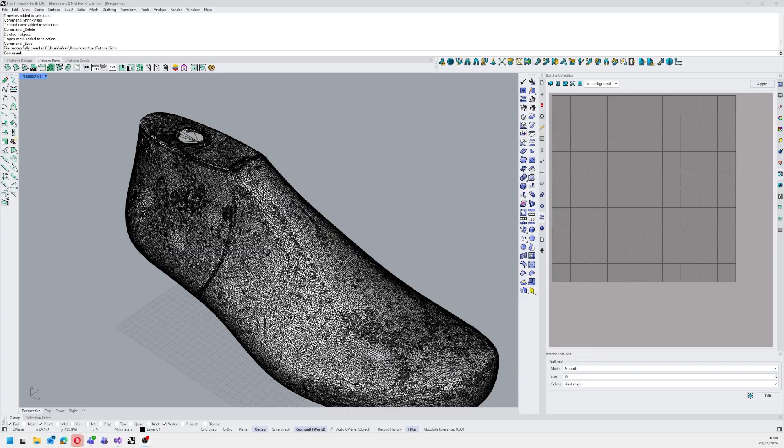Let's start with the first, technical last flattening tool that we have. But first I want to clean up and fix some of the problems that may be in our last. So I have a scanned last here, and to make it work properly, what I want to do is use Rhino 8's shrink wrapping feature.

I already have this, which has a hole up top here. So what I did is basically create a surface and fill that hole like so. And what I'm going to do is take it all and now use the shrink wrap command. Usually these are the settings I like to go for.

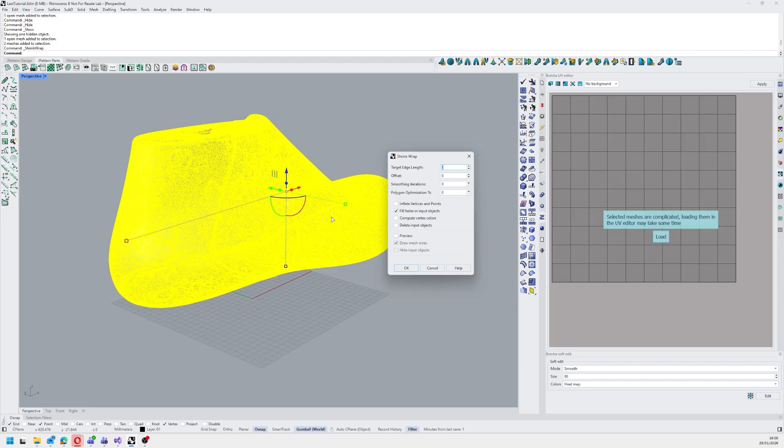It's 1mm target edge for the last, and let's see what happens. Which is kind of a nice result, and this is a much better cleaned up version of my last, and that's the thing I want to use for my flattening.

If I already have a clean last, I probably don't need to do this step. Still, I have seen some NURBS lasts that have potential issues because of the way the surfaces are built. I still recommend, if you want some cleanup, to shrink wrap everything. That will generate a topology which is much more consistent in general, and the mesh will allow you to work with it.

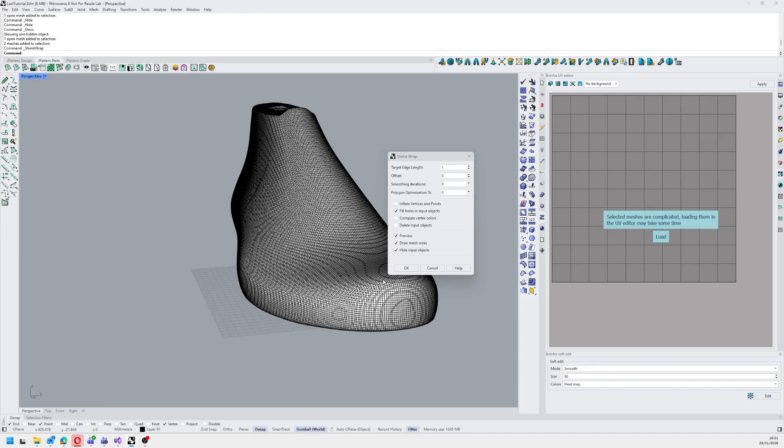So I'll take these and let me put this on a new layer. I'm gonna call it shrink wrap. So I'm gonna take my shrink wrap object, move it to the new layer, and hide the old one.

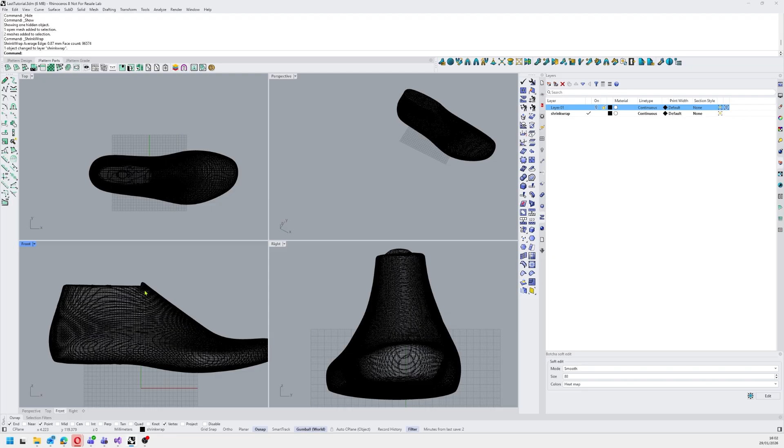The second thing that I want to do is orient the last properly. As you can see now, the front view shows me the side. So that's not what I want.

What I want is to take this and basically align it. I'm gonna move first, move the center point to 0, so that it is now aligned like so. Again, your last may come in an already aligned position. That is great, but if it's not, you will have to align it for the tool to properly work.

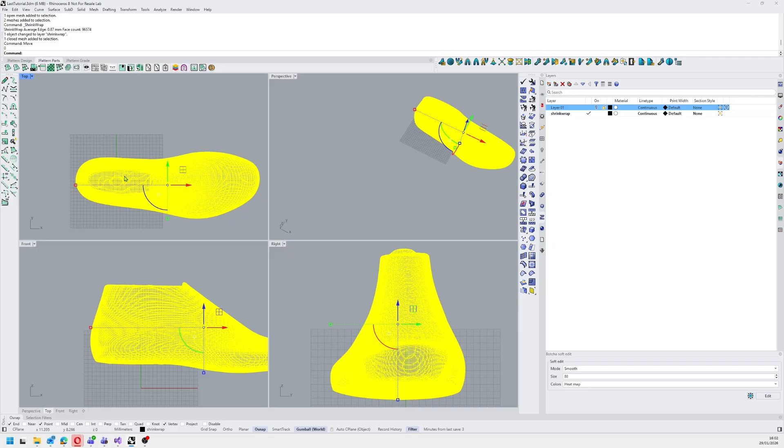So the second thing I'm gonna do is rotate. Again, I'm starting from 0, and I'm gonna rotate this along the y-axis, so that the last is oriented basically like so.

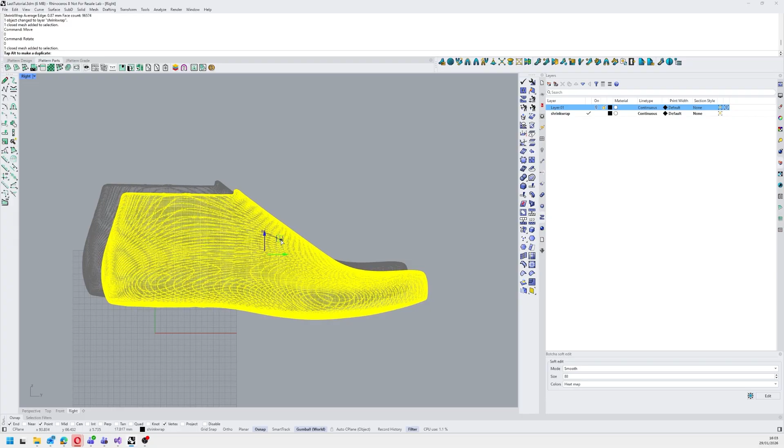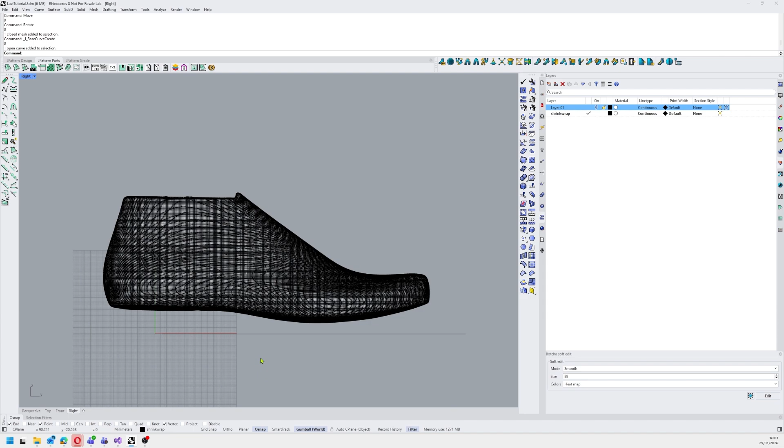I want to also move it a little bit forward. One thing that you have to notice is that the last should all be in the positive Z space. So if I draw a line at 0 down here, you could see that the last stays above the 0 of the z-axis, so that is something that is needed for the tool.

Another thing that I want to do is get a few lines out. You may have them already. In case you don't, you can easily extract these lines.

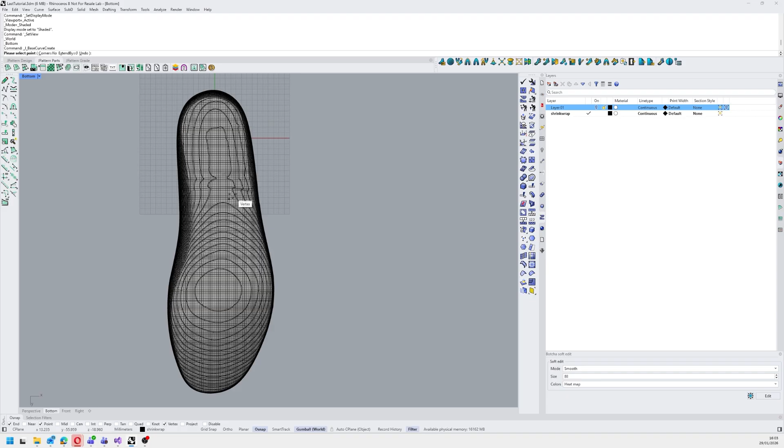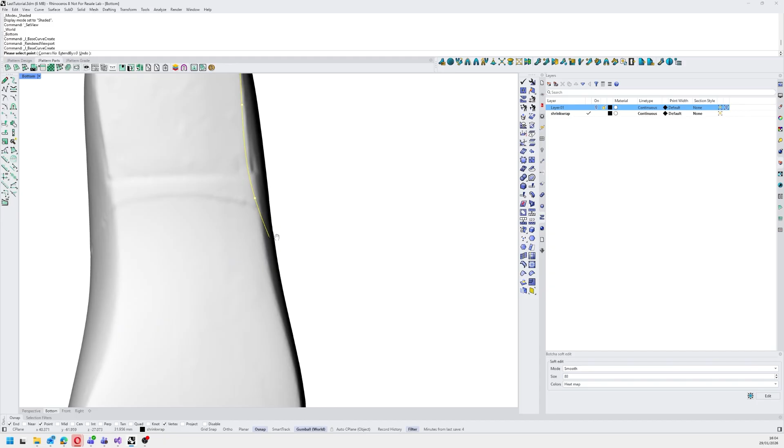And the lines are the last bottom line, the last line, and the heel line. So I'm going to use this as a reference for drawing. Maybe like so, it's better. And I'm going to draw my curve, following a little bit the bottom here.

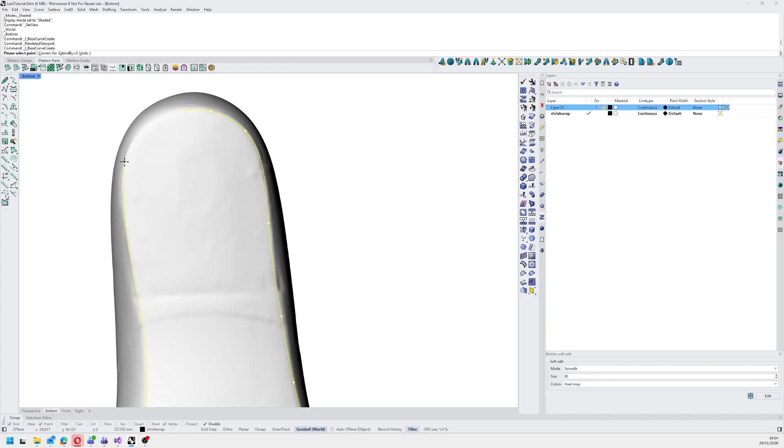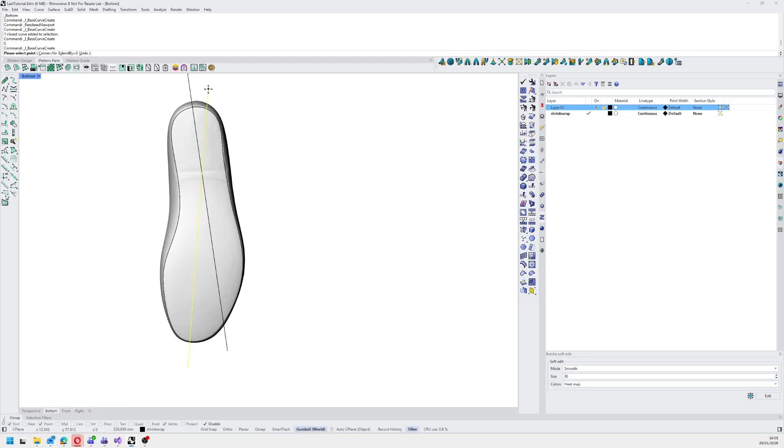Again, your last may come already with these lines, but I'm gonna build them anew. So starting from 0, I'll have this. These two lines, the heel center line and the last center line, and I'm gonna need these lines in order to do the technical flattening.

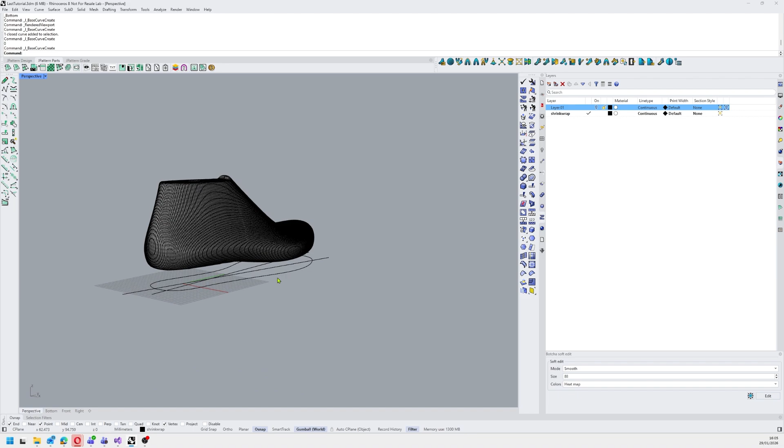So in this case I got a right last, you may have a left, it doesn't really matter. The tool will ask you which kind of last we have. So the tool can be found here, it's the flatten last intercontour curve tool, which is B flatten last. It's asking me for the last mesh, and I can tweak here if it's left or right side. Again, I got the right, so I'm gonna give it the right.

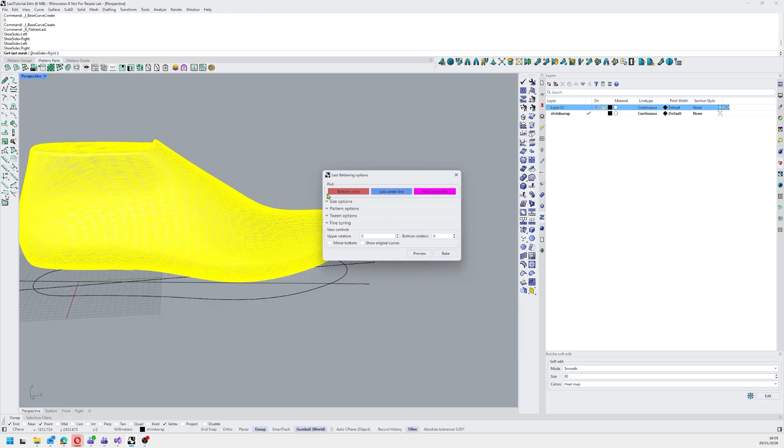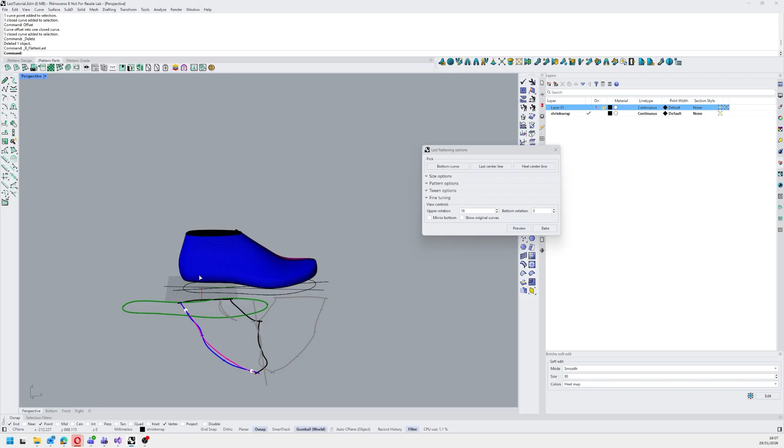Click here, then it's asking for a couple of pieces of information. The bottom curve is this one. I got the last center line, which is this one, and the heel center line, which is this one. If I click on preview, so I got my flattening done.

What happens here? So let's go through a little bit what all the tools are doing. First, I want to maybe lower this a little bit. So, and preview again.

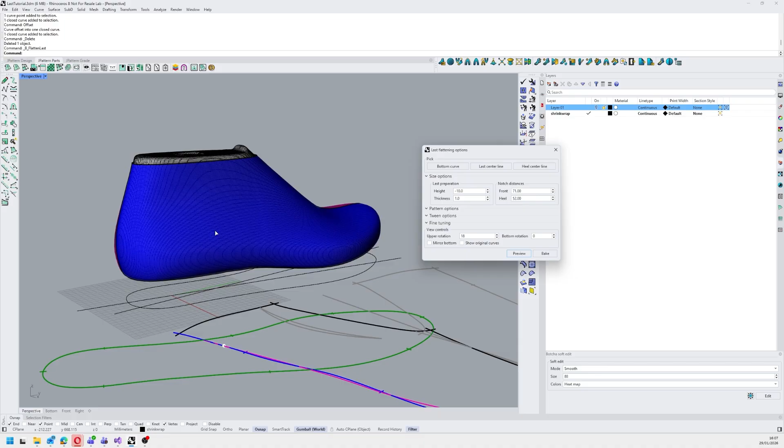So the information we got here is basically our lateral side and medial side that have been flattened, and the bottom has been extracted. You can see that all the colors match, so we have curves that make sense.

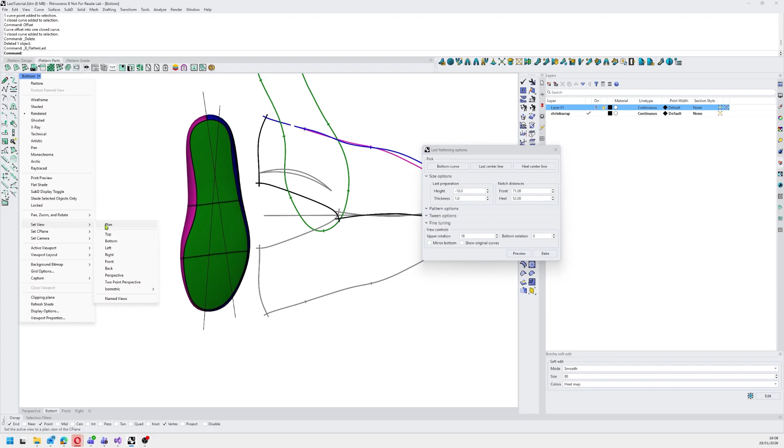Let's go back to top again. So what we have here is the flattening for both lateral and medial. We have the two curves for the medial side, the lateral side, and the mirrored version of this curve.

A mirror line automatically should align the mirror axis on the correct position. The bottom may not be perfectly aligned, but you can tweak this here however you want, if you want it like that, or on the other side.

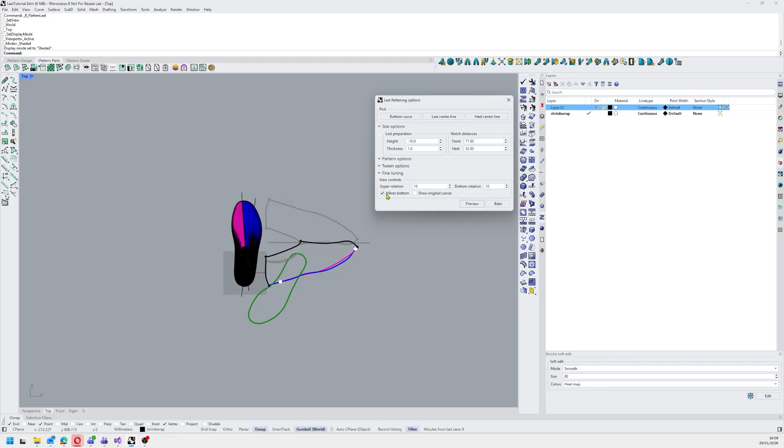So if you want to mirror it, you can click on mirror and it will mirror it, like that.

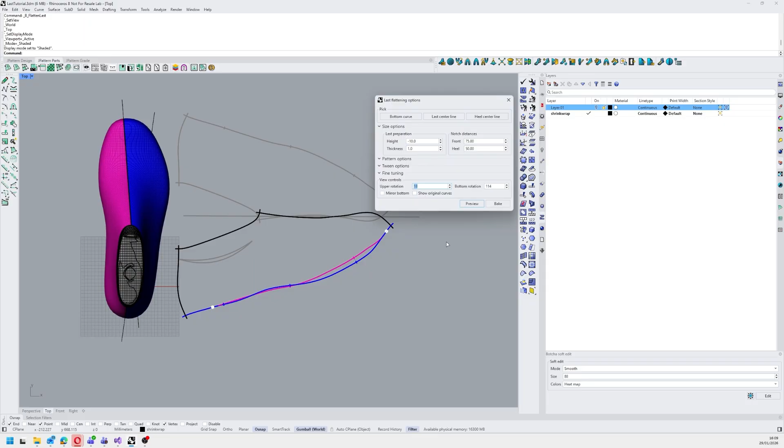Then we have a bunch of other things worth noticing. You can control how the front, so the toe notches and heel notches, where they are placed. You can move them if you have specific needs, say 7.5 centimeters from the front, and these are automatically placed. In the back, say at 5, I can have them automatically placed.

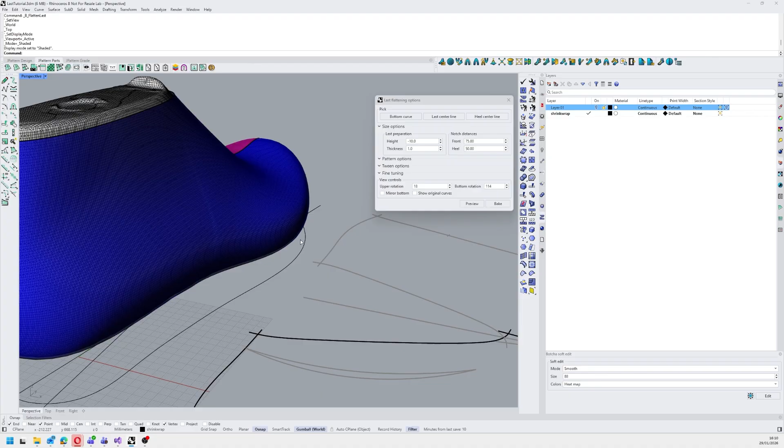Automatically we are thickening the mesh. You can see there's a gap between the original mesh and the one displayed here. This gap is part of the thickness, which should be the thickness of your material. If you're doing a pullover, for example, it should be the thickness of your pullover material.

We have a number of other options. Some collar curves are generated automatically, and the mirror line, how it's controlled. You have options for basically controlling how these two are tweened together.

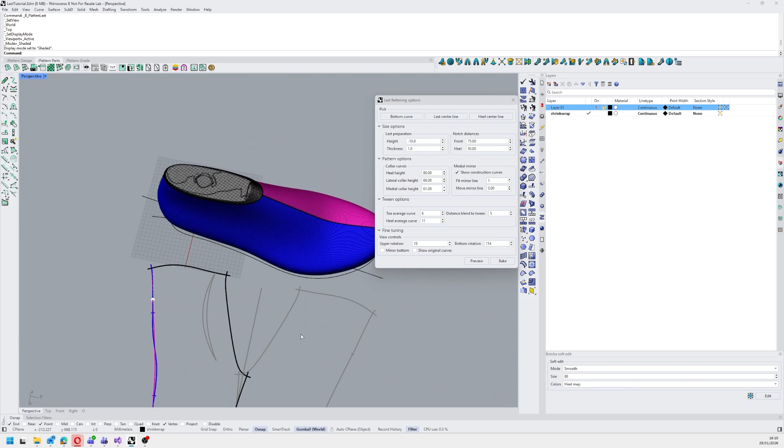So if this is tweened, then it will be separated. For example, the toe tween seems like the blend between the tweened and non-tweened parts is a little bit short, so I can make it a little bit longer, giving it more of a ramp down to that position.

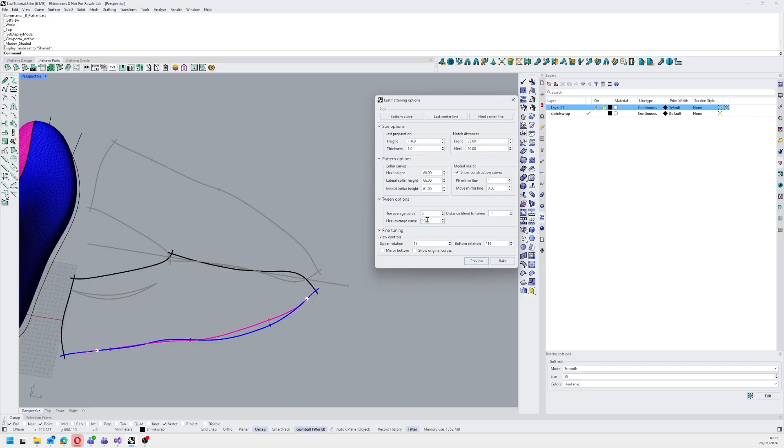And you can control kind of how these two curves behave. Once I am satisfied with my settings, I can simply bake out the result.

Last thing worth noticing is this height, usually a negative height, which is where the mesh is going to be cut off. So for example, the top here I don't care about, so I'm going to cut off this top part.

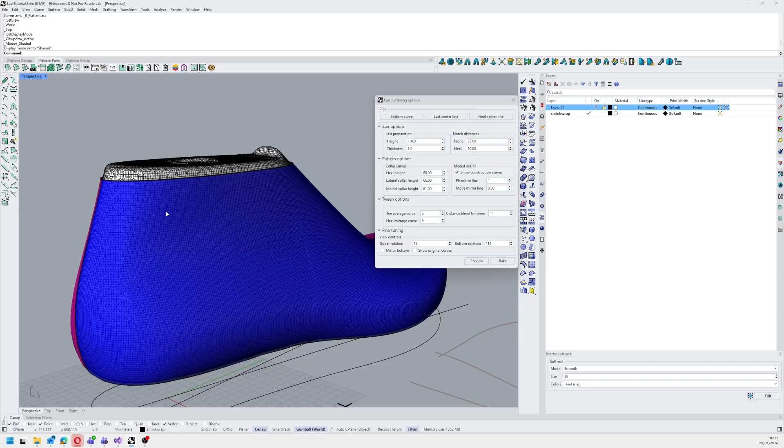So now that I have it, I can just click on bake, and I have my thing that has been saved out to the document.

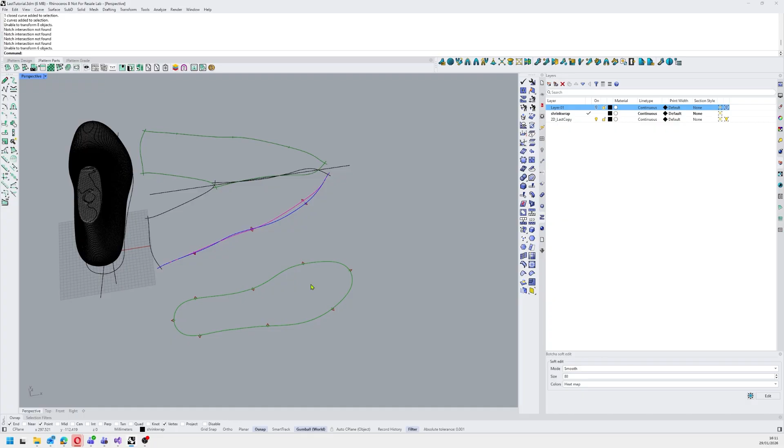One thing worth noticing again is that in this case I have Jevro installed as well. So if you have both Jevro and Boccia, the two plugins will integrate, and in this case I have notches, Jevro notches, which are parametric notches that have been added to the document.

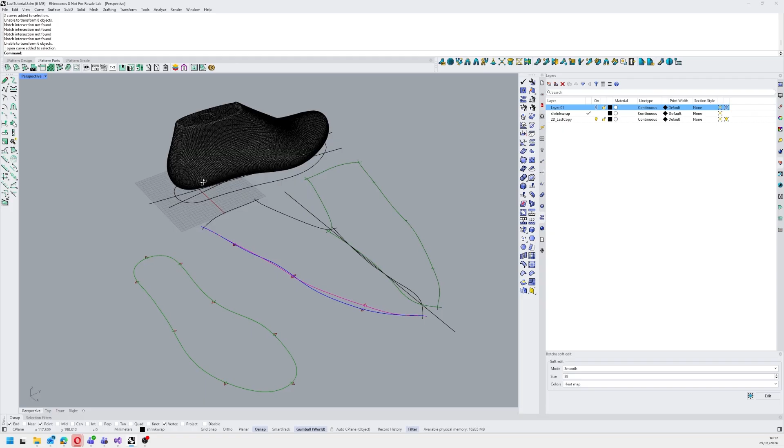This is a little bit how you get from, say, a scanned last, your lines that are needed for flattening it, and then basically getting something flattened. You can do this with any kind of surface.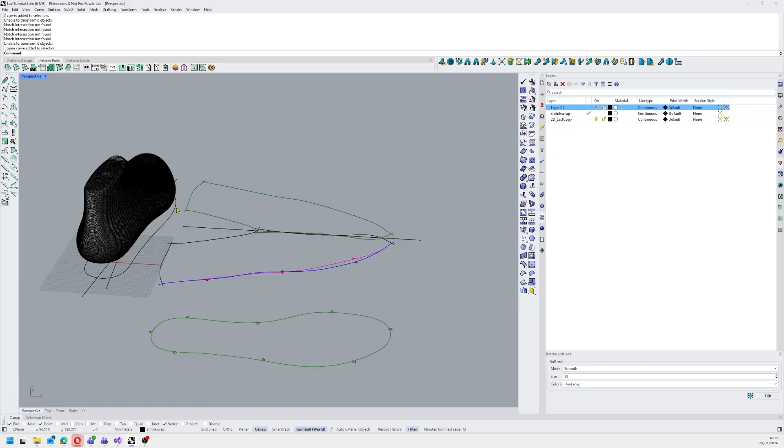That's usually the simplest thing, if I have a scan, or if I already have my last library, I have the last, it's going to be much easier.

So what we are going to do now is we're taking this last, which is a climbing last, a very particular last, and I want to flatten this with the tool I have in Boccia.

First, I already shrink wrapped this from a scanning, so now it's a closed mesh. You can see by clicking, you look up at the command line, or on the Mac it's down here. Just click and get the information that it's one closed mesh.

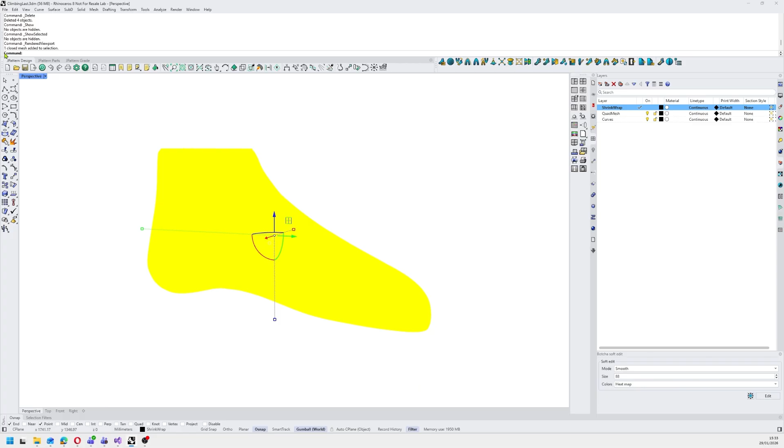It doesn't need to be closed necessarily, but usually if you shrink wrap something, in this case I had a scan, you get some better results.

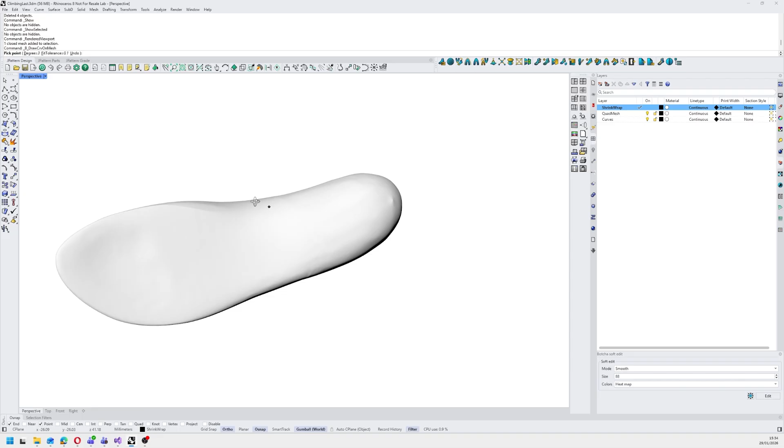So now I want to use my trusty tool here to draw a curve on the mesh. I'm going to draw on this, starting from the feather edge, which here is kind of complicated because in the front it's clear, but in the back you've got to use these reference points that are on the last. So I am going to draw something down here all around, and this will serve as my bottom.

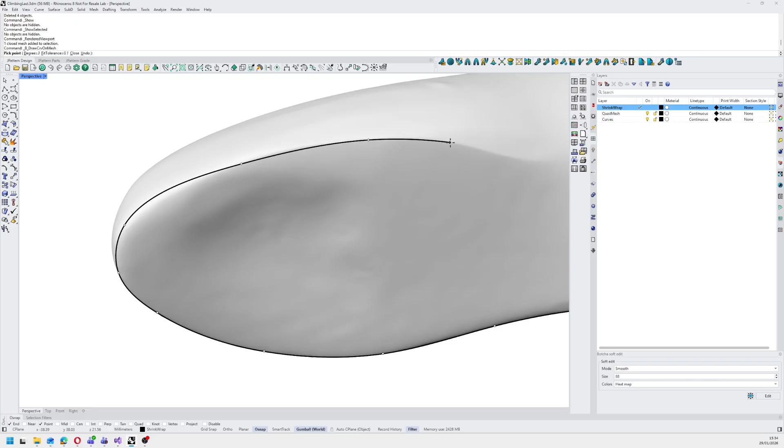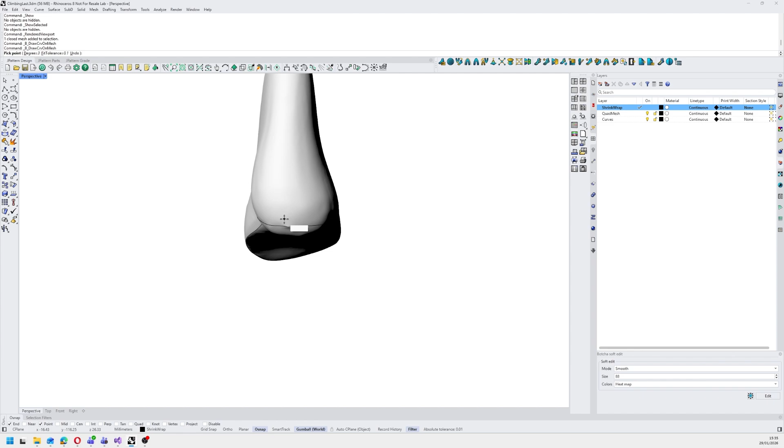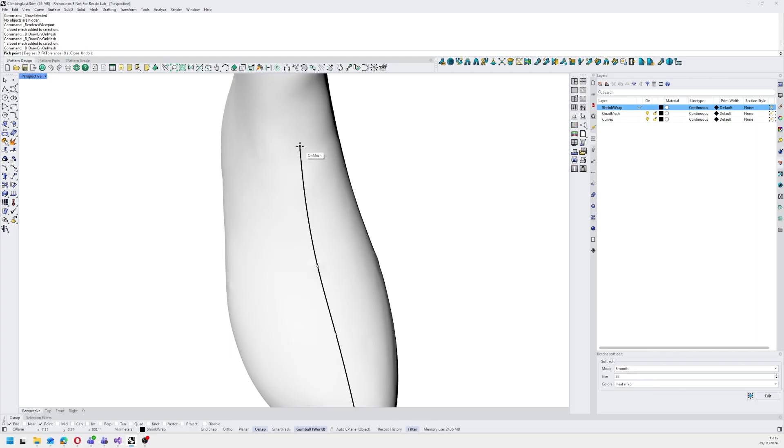And I close it like so, and then I have my bottom curve, and I'm gonna do the same thing for the back. So I'll start from here, kind of try to go straight up, more or less this split between lateral and medial. Same thing goes on the front. So I go from here up, and I go up here.

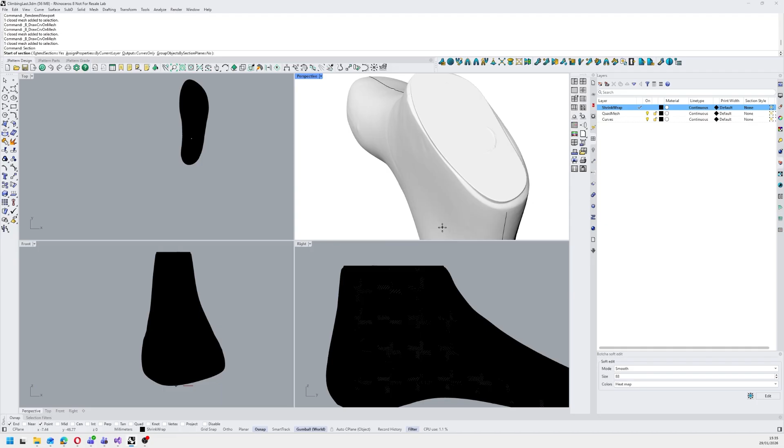Now for the top I want to also get a round curve. I'm going to use a section for this because it's faster. One thing that I usually do is, since I don't really need the top part, I'm going to take this section not exactly on the top, but a little bit lower down. This usually helps quite a bit. It takes a while because the mesh is very heavy.

Now if I go back here, let's go to my curve layer. I'm gonna move all the curves to my curve layer. There it is. Hide the shrink wrap, and there we have it. So now we have these curves basically defining the seams of where I actually want to cut my last to flatten it. Again, it doesn't need to be exactly precise, it just needs to be somewhere around and closing.

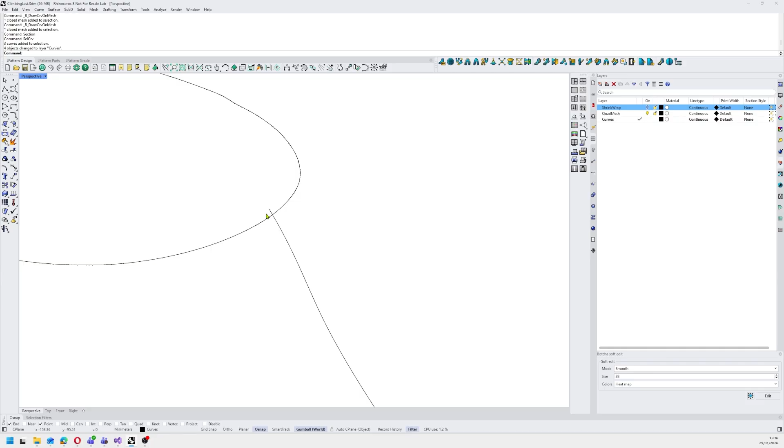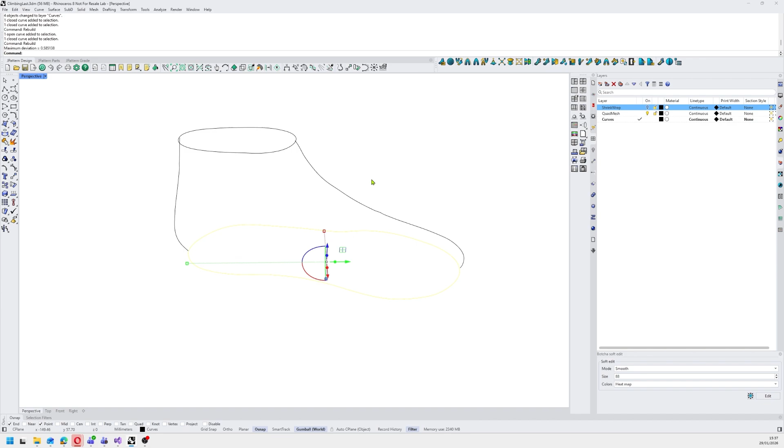One thing I want to do is take these and rebuild them. I can either use rebuild or rebuild non-uniform. I'm gonna use uniform rebuilding for this. Yeah, like so, this one. I'm gonna use rebuild non-uniform for these other curves, rebuild curve non-uniform. I think it's fine. So now my curves have a way lower point density than they had before, because they were directly drawn on the mesh. But now it's kind of okay, I would say.

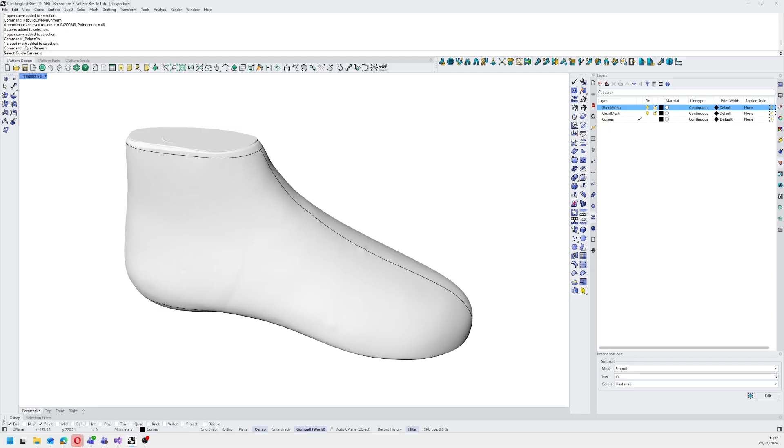I take my shrink wrap, select it, and use quad remesh. Quad remesh can also be found down here. So okay, I'm gonna select my curve. I'm going to always use select curve because it's just faster. I want to have create edge loops. I usually disable detect hard edges for this because I want the edges to fall on the curves that I drew. And target edge length to 1 millimeter. I think I'm working in millimeters.

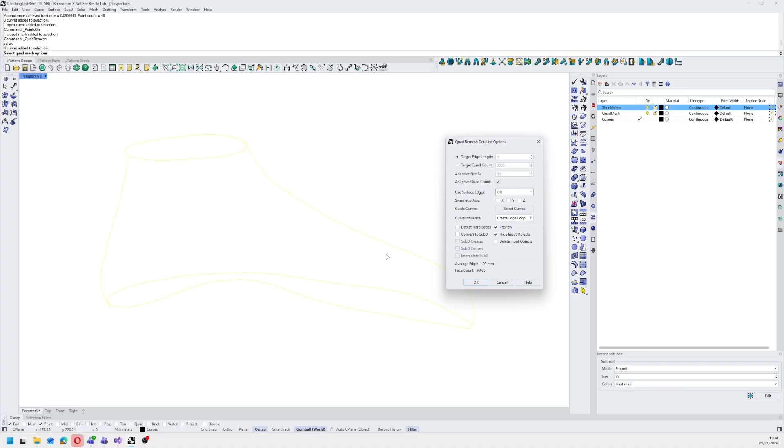It's more than fine. So let me hide the object to show what's gonna happen here. There it is. So I can see that now I have basically my edge loop running where I wanted them, exactly like so. So I have this kind of nice topology.

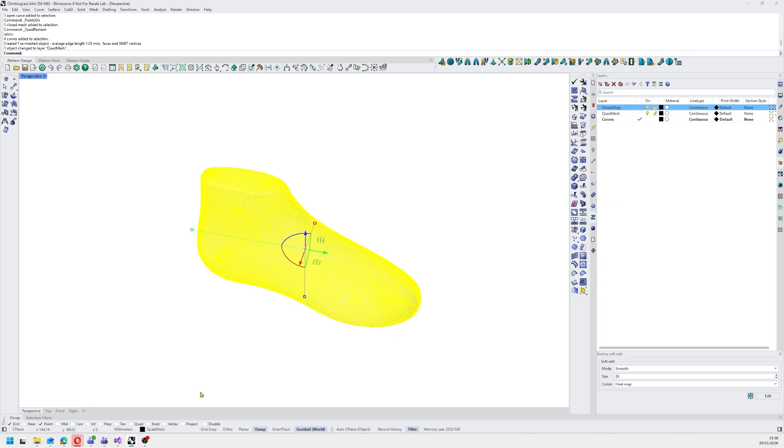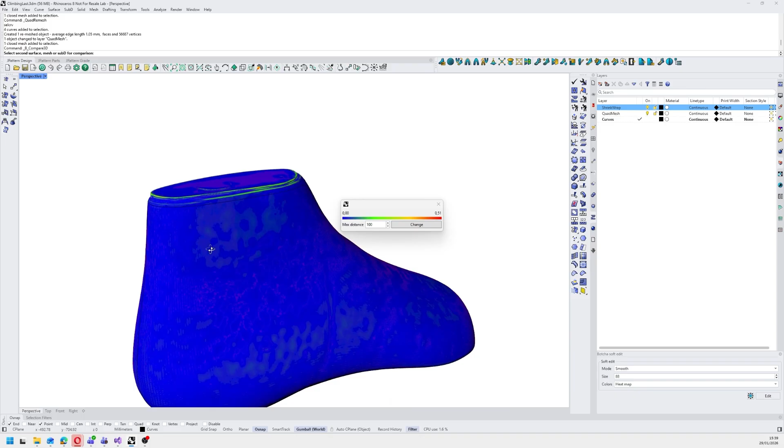This allows us to basically keep the new object very close to the one we had at the beginning, but without having the whole geometry. We can use this compare surfaces tool just to try to understand, and you can see that the maximum deviation, which is the red part, I can't even really see where it is here, of course, a little bit. It's 0.51 millimeters. It's pretty close to where I was.

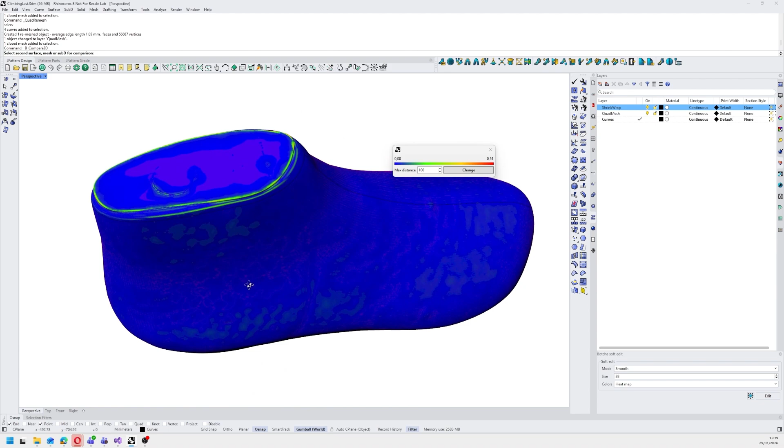Here we have some deviation, like 0.25, but again, for this sort of workflow in general it's irrelevant. So here I'm gonna hide my shrink wrap. Now I have my quad mesh here, and it gets back to shaded.

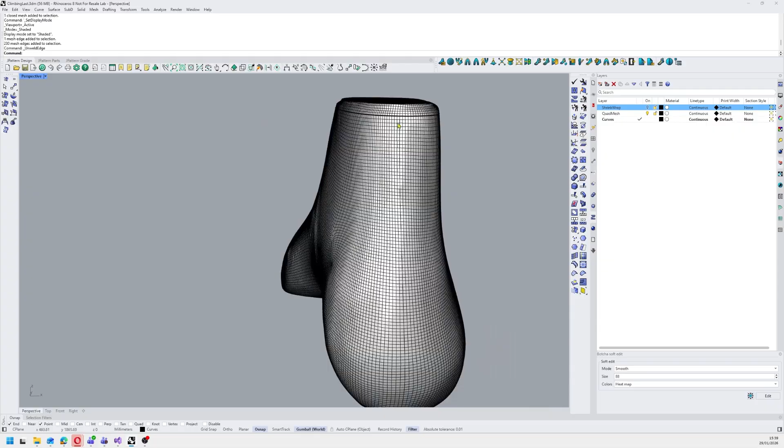Next thing I want to do is unweld, so I'm gonna pick this edge here. This is the one I want. I can either use unweld from here, right click, and unweld edge. I'm gonna do the same with the bottom. You can see that now I have the curve here, so I can easily track it - with Control and Shift I can pick my edge loop by double clicking on the edge I want to select.

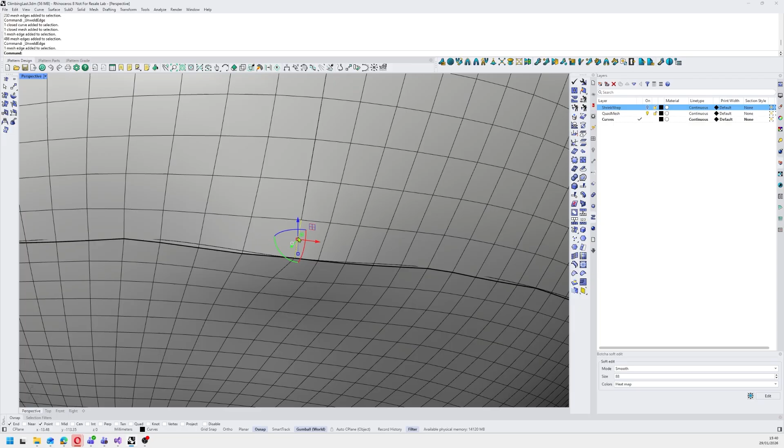I'm gonna again unweld, spacebar for repeat last command. Same thing is gonna happen here. Nope, picked the wrong edge. I want to pop these off, so I'm gonna explode this. I'm not interested in the top, just gonna remove it. Now we have the bottom as well being removed.

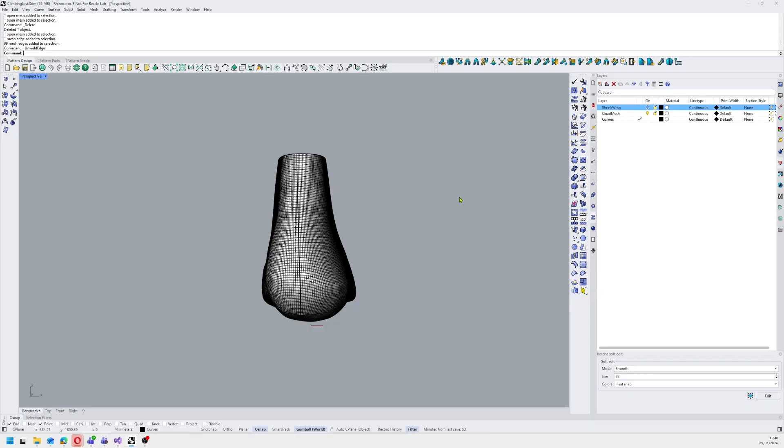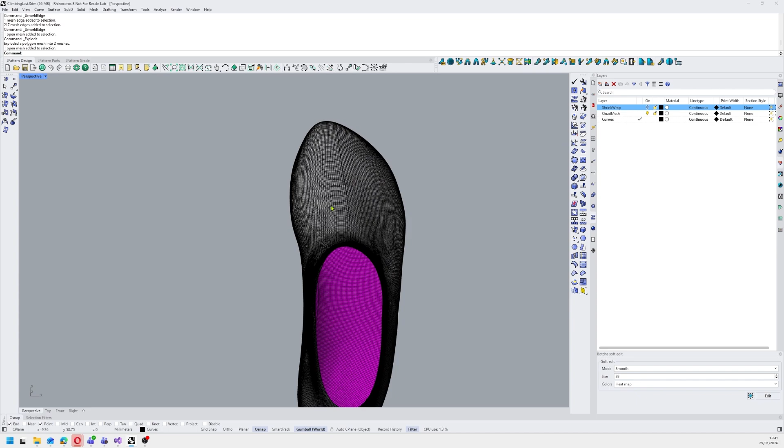So here we are. I'm gonna split here in the back. Always go for unweld. And same, want to split in the front. Again, maybe not the best drawing for the curves I chose, but I think it's fine. And explode again. Now I have basically my last split into the lateral side, the medial side, and the bottom. It's kind of what I want as a pattern engineer, as a flattening.

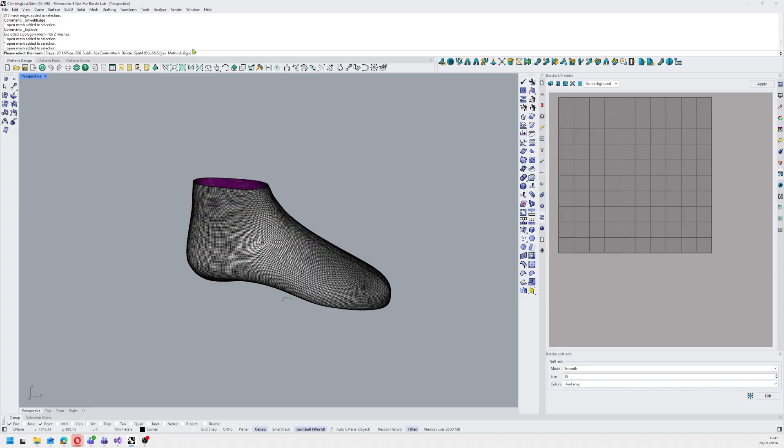The next step would be to go to the UV editor, which will allow me to flatten this thing. I'm going to click on the first button, Unwrap. I like to use these settings - in this context, I'd say these are the best settings.

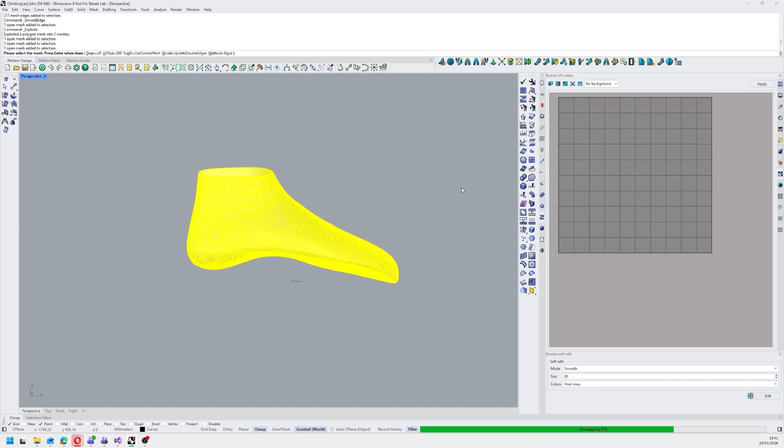I'm going to use 20 steps for the algorithm, 500 millimeters as canvas size, and the rest doesn't really matter, it should stay as it is. I'll select the 3 meshes, accept, and unwrap it. I'll get my flattening - it says there's a lot of vertices, but yeah.

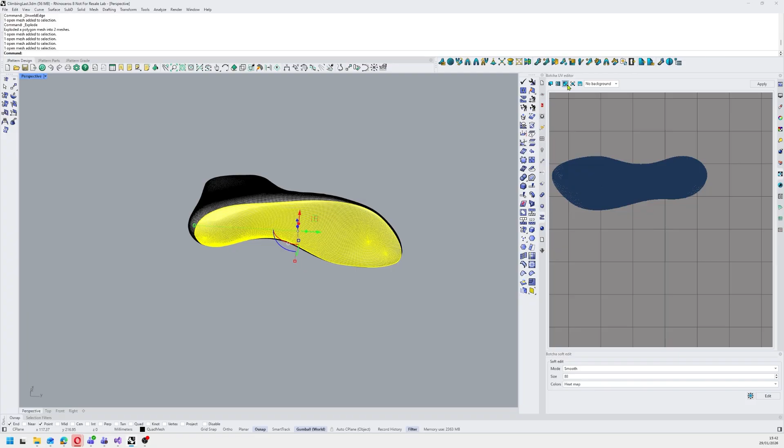Here it is, the flattening. Let's start from the bottom - I'll take the bottom as it is. We can, if we want, use Live Unwrap to try to relax it a little more, but you can see with 20 steps it's already very much to the relaxing point. So I'm going to add this to the document, add to document, for top.

Then we have our bottom, and we can see here we have 2 separated pieces. Let's flip them right first.

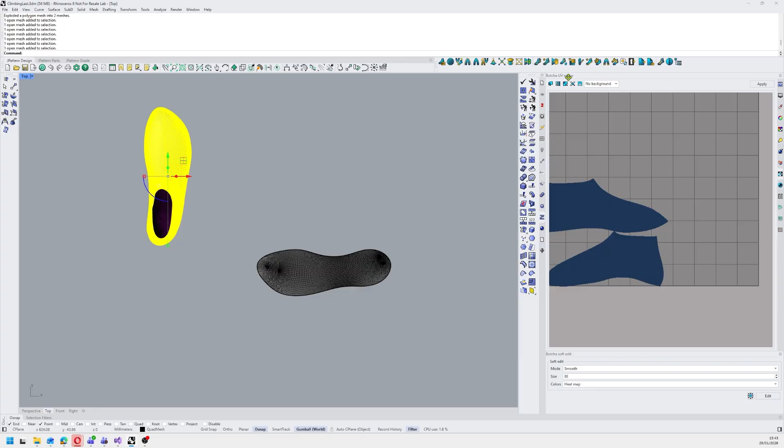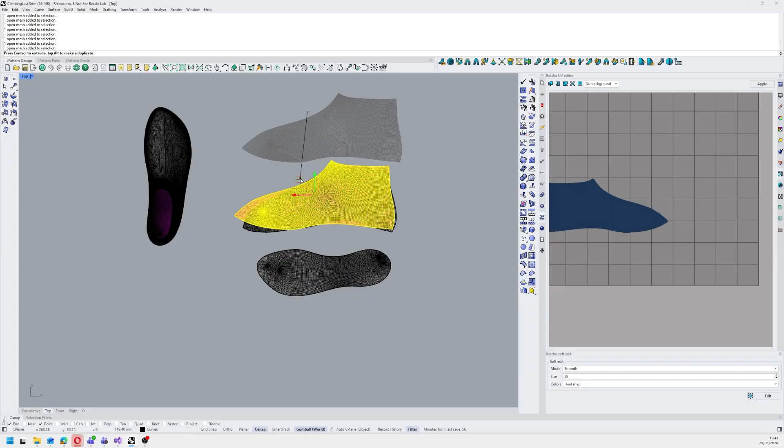Here we have a couple of options. First is the option of just taking these pieces and adding them to the document. Then we could sort of align those - if I want to align them more or less in the same way I'd have on a pattern, this is option number 1, and we could use this for drawing internal and external.

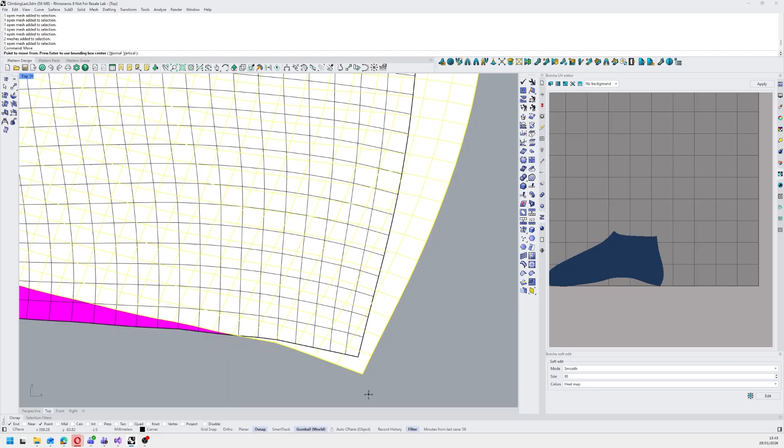To have a flattening similar to what we had in the technical flattening, we can simply use a couple of commands here - we can use move to basically align on the vertex. I want to add snap to the vertex, and then use rotate from this vertex to the toe, to be aligned like so. Again, I'm not 100% sure this makes sense in such a last, but still we can do this.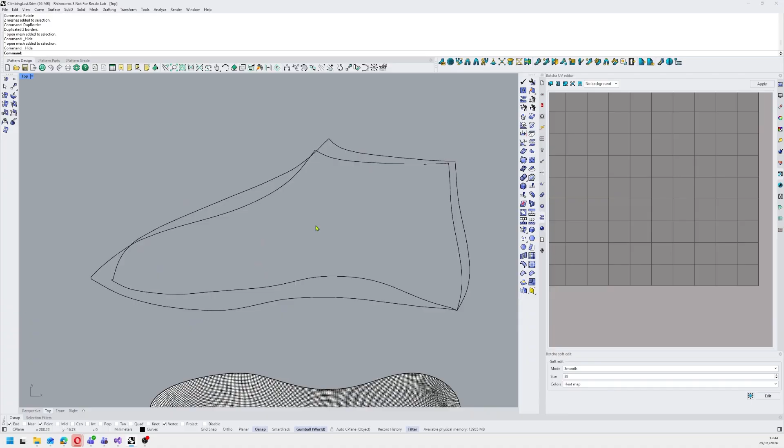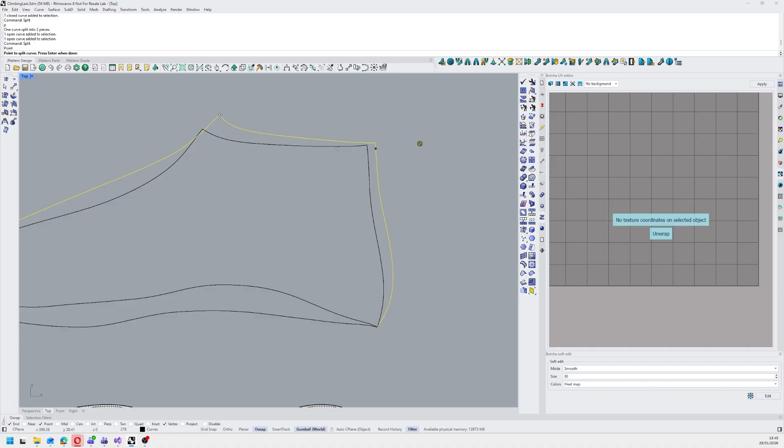And then I'm going to use the borders to get outlines. Now that I have my outlines, I can run the split - one point - and split these curves. Split here and here. So now I have a couple of curves, same thing goes here.

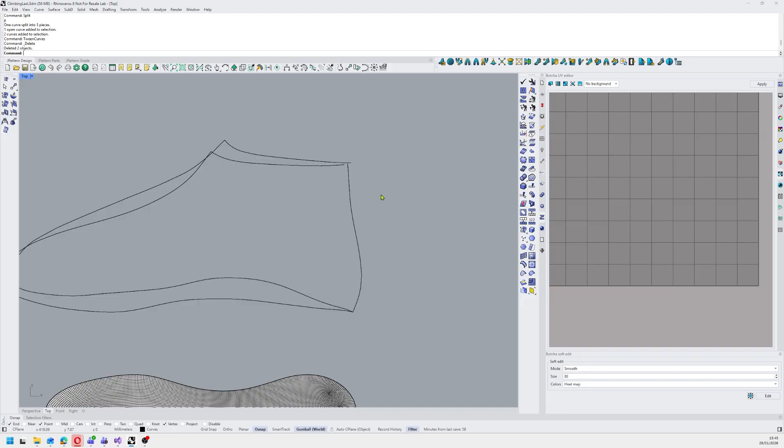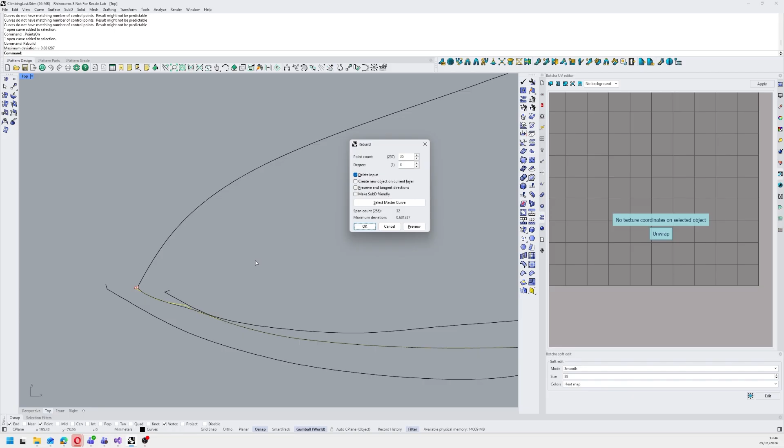Split down here. Okay, now that I have a couple of these curves, I can use the tween to get one curve here, tween, get one curve here, tween, get one curve here, and the same here, to basically get a couple of curves that are flowing.

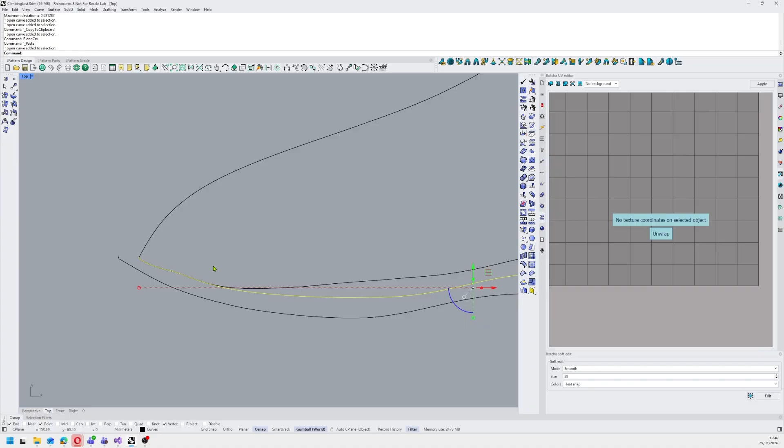And then I can use the blend curve, this one to this one - I can use tangency and move this around. We have one like so, and then a second, the same way.

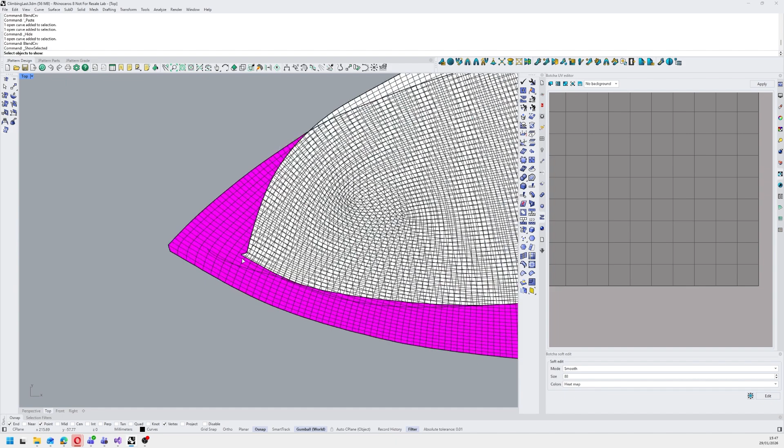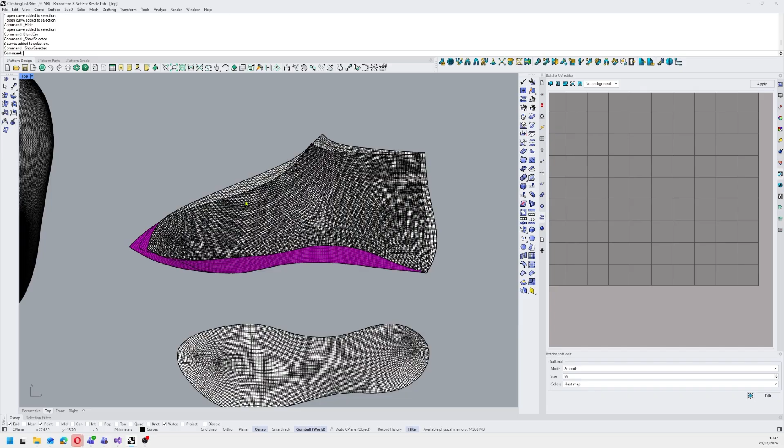There it is - now I've got my flattening with lateral and medial averaged. This is a way where you can get to a technical flattening, more or less in the same way, but then you can also use these two meshes that I have here for the remapping. This is of course always an option, and you could do something that's a little bit more refined.

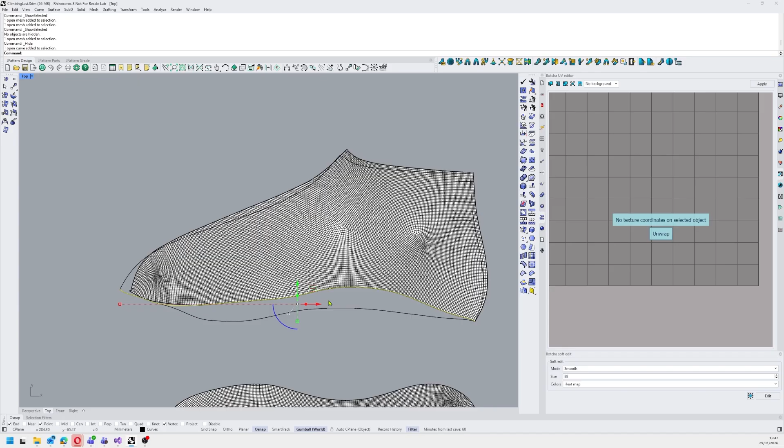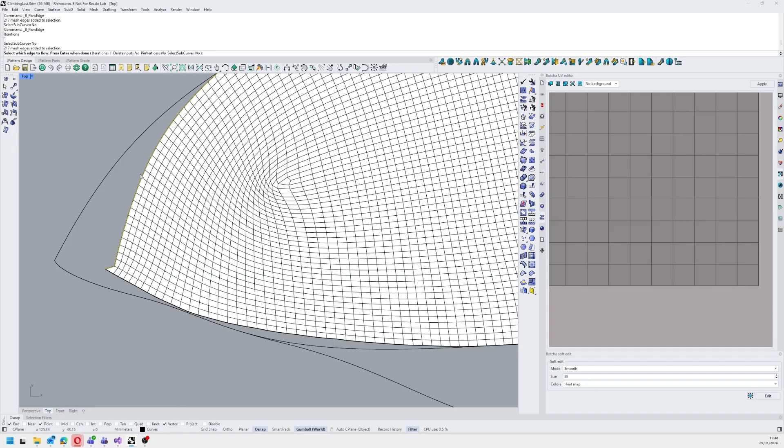Let's try to do it with one. I could take these, then fit it down here with the flow edge, so I can easily flow this edge here, and then take the subcurve, and then take this edge and flow it here, and then take this edge and flow it here. This one, flow it here, and the last one, bring it here. So accept.

And then it will take a moment and flow my edges to the curves that I want. So it's fitting the unwrapping into my averaged out, more regular, cleaned up flattening.

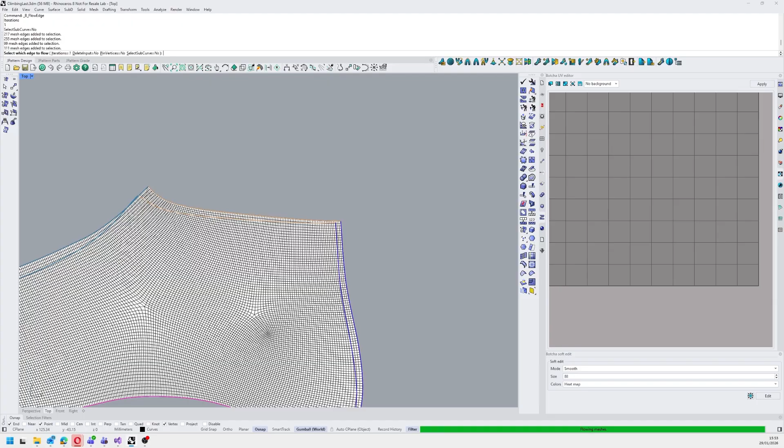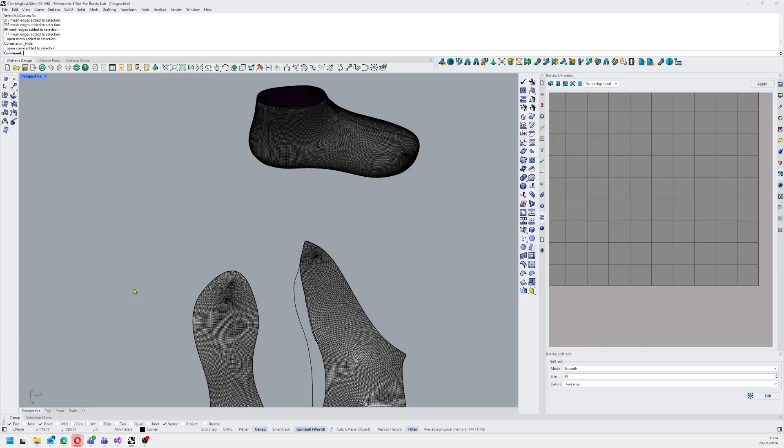And once I get my - let me hide this - the new mesh has been properly merged to the right positions, so this can be used for remapping things out and working in 3D.

So yeah, this basically covered it a little bit. I used this last as it's a bit of a weird last to show you something different than a more regular last, and to demonstrate the power you have at your disposal with the tools offered by Bortsch.